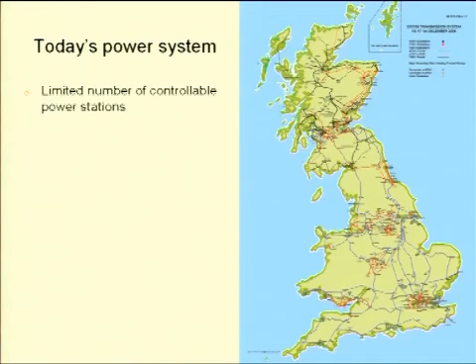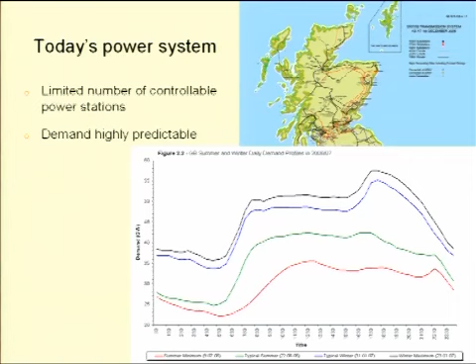So what do today's power systems look like? We have a limited number of large controllable power stations. Because they are thermal stations, we can control them. Demand is highly predictable. This is a typical daily demand curve, taken from National Grid's 7-year statement. Depending on the time of the day, of the year, we have a morning peak, then an evening peak, and the demand drops, which is highly predictable and repeatable. So basically, the whole system operation is demand driven. Whatever demand requires, it is delivered by generation.

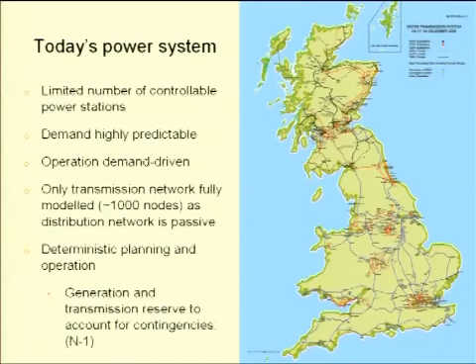For modeling how to run the system, we model only the transmission network, which means about these 1,000 nodes, because distribution networks are passive, and they've been over-designed in order to cope with any amount of load required from them. And the typical approach is deterministic planning and operation. All of that has served us well for at least 50, 70 years. Coping with contingency is due to the N-1 contingency criterion, which I was talking about yesterday when I was talking about the blackouts.

So what's the future power system? We've been talking about it for the last 2 days a lot. It will probably be characterized by a very high number of uncontrollable renewable plants, and what is important, connected at both transmission and distribution level. So one of the main differences is that transmission level and distribution level are not as clearly divided as they used to be. Distribution networks start to be also active.

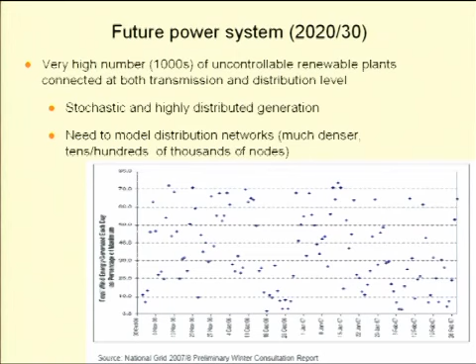So we will have stochastic and highly distributed generation, and what it means we know already. Mark O'Malley showed those kinds of slides today, I showed it yesterday. Generation can go all over the place. It is stochastic and highly distributed. And because that generation is connected at distribution level, for a lot of analysis we need to go into modeling of distribution networks. And this is not a simple task, because distribution networks are, I don't know, tens or hundreds of thousands of nodes for the whole UK, but basically it's an order or two orders of magnitude bigger task.

Now, the next thing is smart metering enabling demand response, which is the smart grids, the famous smart grids. People argue what smart grids are. Well, certainly one useful thing I can say about smart grids is they are very useful to put on any grant application. But what else are they? Well, this is the view from one of those European projects. Again, basically everything is nicely connected together, wind, solar panels, and controlled by some means

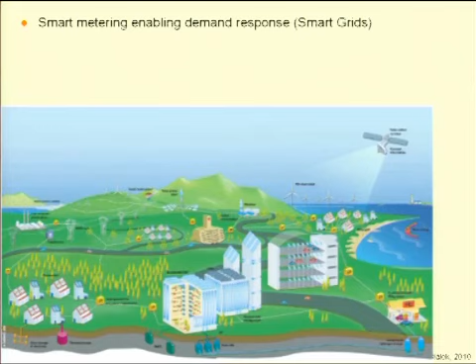The next thing is possible electric cars and storage. There's been a lot of discussion about it. From the mathematical point of view, one of the interesting things is that the storage and time shifting of demand creates stronger linkages between time periods in power system models. At the moment, power system models are run from one time instant to the next. When you have time shifting, there are basically linkages which need to be explored.

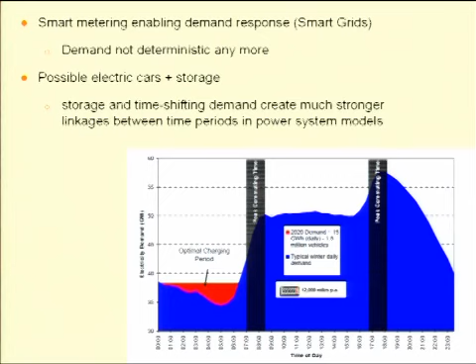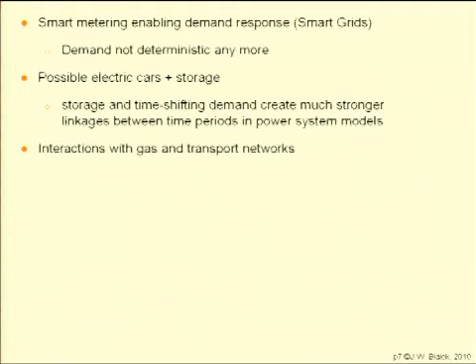Now, again, this is a slide nicked from one of the National Grid 2020 consultation documents. Basically, electric cars as such do not present a problem, providing you charge them at night, when there is enough spare capacity in the system. However, if you do them at peak demand periods, then you can create a lot of problems for the system. And the next challenge is interaction with gas and transport networks. Obviously, the generation is partly in gas, and cars mean transport networks. So all those things are quite closely connected together.

So in short, to summarize this quick review, the future power system, one can say for sure, will be more complex and more stochastic. So we need new modeling tools. So what's needed? Obviously, what we need is modeling of highly distributed and stochastic generation and demand. We did some work on generation. The question how to model demand is very much unresolved. There were probably hundreds of wind studies, what is the wind resource in this country and other countries. What I feel is missing is the stochastic characterization of resource and demand. What are the linkages between the two?

The next issue is, because of the distributed nature of the generation and demand, we cannot deal with models with hundreds of thousands of nodes and modeling of individual customers. We need tools for aggregation of distribution, generation, and demand, and modeling of interactions between them. So to summarize, what we're talking about is a huge complex system, and something which this morning Sean, no, sorry, not Sean, Mark was talking about: modeling of human behavior. If people don't charge those cars at night, for example, they can completely wreck the power system.

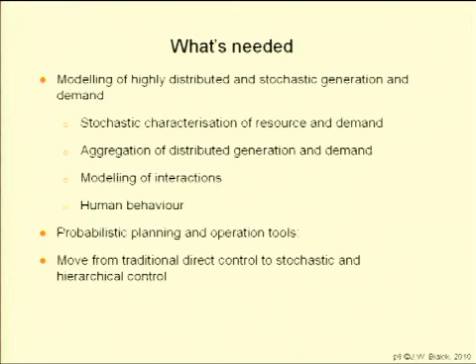And something I've been talking about yesterday is probabilistic planning and operation tools. At the moment, it's all deterministic. In the future, we might need probabilistic planning and operation tools, and it is not clear at all how they will work and whether they'll be accepted. And as far as control is concerned, at the moment the centralized power plants connected to the system are controlled, basically, because they're controllable. In the future, we might not be able to control them directly, so we might need to move from traditional direct control to stochastic and hierarchical control. And again, it's a big problem.

So these are quite general statements. So let me go into more detail and give you three examples of the work I've been involved with in Durham recently. The first is risk calculation and capacity credits, which is the work done by Chris Dent, who is currently on secondment with National Grid, and that links to some extent to the presentation just a few minutes ago by Steve Smith from Ofgem.

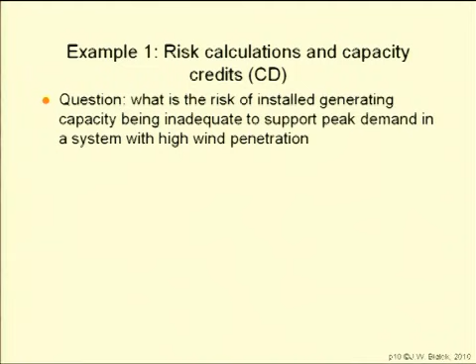So the question is, what is the risk of installed generating capacity being inadequate to support peak demand in a system with high wind penetration? Actually, the question is more general than that. It's not only peak demand as such, because peak demand may be 1 hour, but what is the possibility of the generation to support demand over the period of the peak demand, which can be the whole winter. So in other words, we can put this question: what is the capacity credit of wind generation?

And again, the slide was in the previous presentation. And the work Chris did was to evaluate the risk of a projected fleet of wind plus conventional generation, and calculate the capacity credit, which is basically what would be the traditional thermal capacity which would give the same amount of risk as in the all-conventional system.

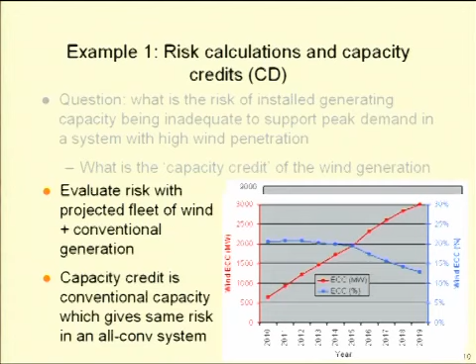Another way of looking at this is the effective capacity credit of wind. So this is over the years. As you can see, the value in megawatts increases over the years, while percentage-wise it drops. It doesn't drop as dramatically as Mark O'Malley was showing this morning in the slide. If you want to ask why that is, I'm happy to take it, or Chris will answer this question after my presentation.

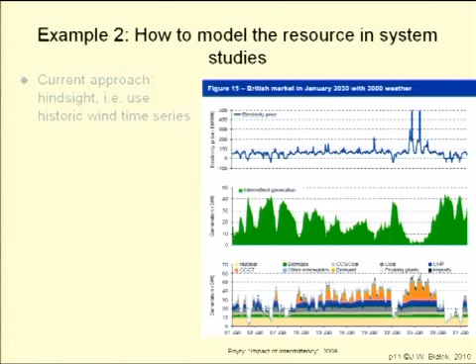The second example is how to model the resource in the system studies. The typical approach is to use hindsight. It means if you want to know what is in the future, basically we use wind data from the past. And there's a famous Pöyry intermittency study which was published last year, where they look at the British and Irish market in 2030, assuming that we have the wind of the year 2000, and they got different results. So there are some examples of the prices and generation.

Well, there is nothing wrong with that approach. It gives robust results because it uses actual wind generation for a particular year, but provides limited insight into what might happen in the future. So what we believe is needed is a stochastic spatial-temporal characterization of the resource, how the wind will vary, and demand.

Yes? Yeah, you seem to go into the modeling or predicting aspect, but things like should the wind generator be connected directly to a grid at all? Questions like this, will they be part of your talk? Maybe we'll talk about it at the end, because during the presentation maybe just clarification questions.

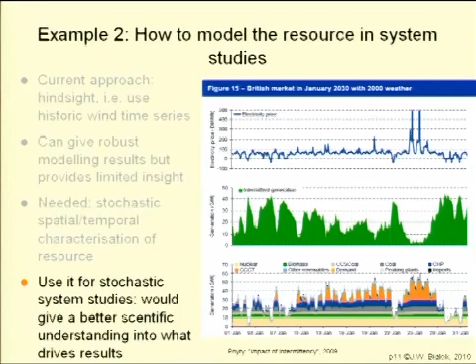So if we have that spatial and temporal characterization, we could use it for stochastic system studies, and that would give us better scientific insight into what drives the result the way it does, rather than just doing results for wind in a particular year.

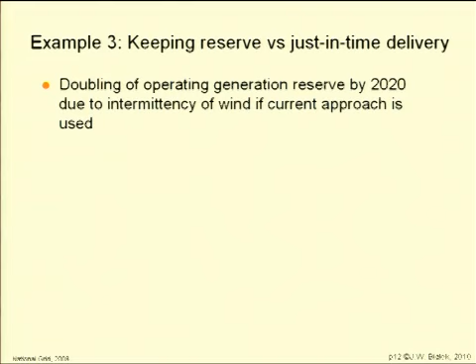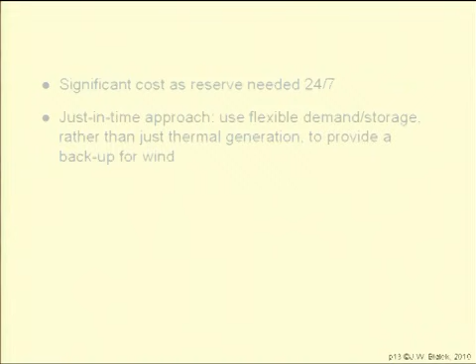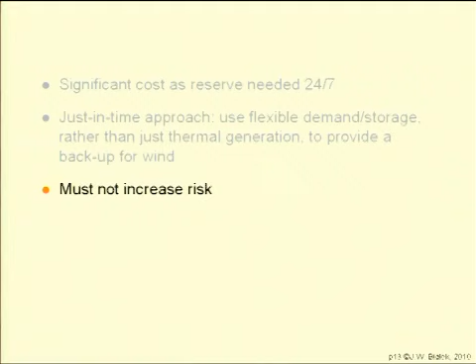So that is obviously quite expensive, because that reserve is needed 24/7. So a just-in-time approach would be to use flexible demand and storage rather than just thermal generation to provide a backup for wind. This is obviously easier said than done, and it must not increase the risk, and National Grid is by definition a rather conservative body, and quite rightly so, because at the end of the day we need to keep the lights on. So this is quite an interesting issue. It requires approaches from statistics, stochastic control, because we are talking about stochastic generation and stochastic demand, and operational research. So this is a very interesting research issue.

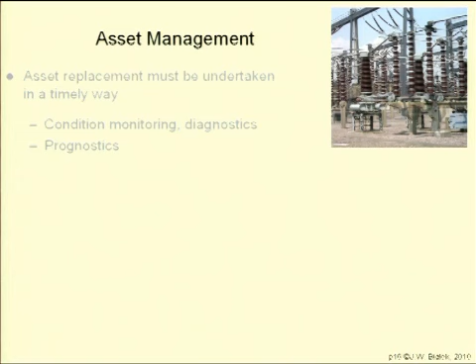I nicked that slide from Andy Thomas from Central Networks, by the way. So asset management is an important issue. The replacement must be undertaken in the appropriate way. So we're talking about issues, again, mathematical modeling, condition monitoring, diagnostics, prognostics. It means looking to the future rather than to the past. One problem is that often we have limited information about some of the assets because they are replaced before they fail, so we don't have any failure characteristics.

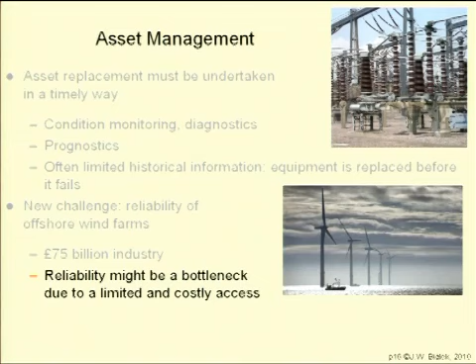And the new challenge which is coming is reliability of offshore wind farms. Because access to the wind farms is limited, and this is a big industry, a 75 billion industry, reliability may be a bottleneck due to limited and costly access. So involvement of statisticians and mathematicians is required, and we are doing some work on that using Bayesian statistics.

Funding opportunities for energy research. Well, actually, as a researcher in energy, I have to say that basically I don't remember we've ever had such a good time. There are plenty of opportunities. The Research Councils UK program is the largest, about 200 million pounds, which is more than all the other programs taken together. And fortunately, UK ERC are very much for interdisciplinary research. It means engineers working with economists, working with mathematicians, working with social scientists. So this is exactly what is required.

SuperGen is the flagship initiative, but it's soon to be folded down because it's coming to the end. And now briefly about two initiatives. One is Grand Challenges in Networks, which will look 20, 40 years ahead, probably announced in the summer. I've been to the workshop when we discussed the areas, and some of those areas which we've talked about probably will be included. Flexible grids, uncertainty and complexity, energy and power balancing. We don't know what the call will look like, but it's quite likely to include those subjects.

And the second call, which has been out for about a couple of weeks, is Mathematics Underpinning Digital Economy and Energy, deadline of the 1st July again. So this is basically for mathematicians, how to model economy and energy problems.

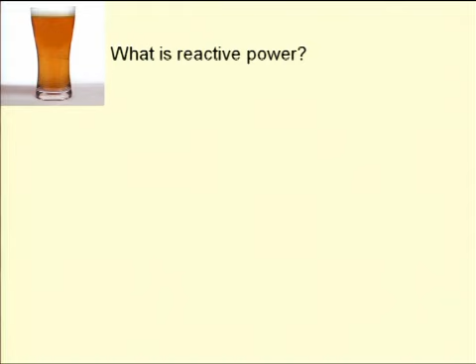And that's all you need to know about reactive power: it is oscillating energy between the source and the load. It's called reactive power or imaginary power because you cannot use it. Symbol is Q, real power is P. Well, this is one of the confusions with economists, because for economists Q is quantity, P is price, so sometimes we have those problems with nomenclature. So on average, obviously, the energy transfer is 0. It means you cannot use it for any useful purposes, but it is important to remember that reactive power, those oscillations of energy, are always there in the network.

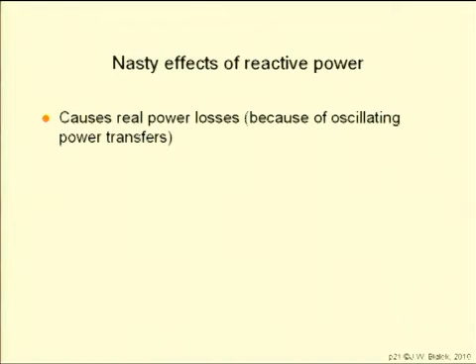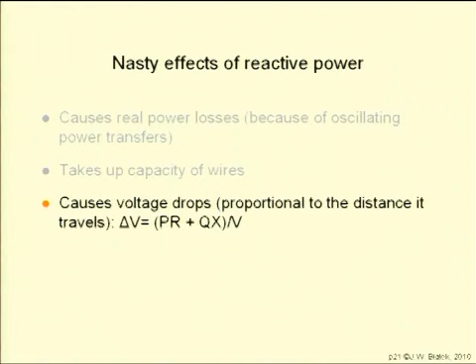And in the high voltage transmission network, X is much higher than R. That means that the voltage drops are much higher due to the reactive power, which means that you cannot transfer reactive power over long distances, because X becomes very high. It's basically a linear function of the length of the line. And you can compensate reactive power by capacitance. And that's why it is also sometimes called voltage support, because you have improved voltage characteristics.

So conclusions: grid integration, smart grids, and the need to rewire Britain create a huge pool for new research. Collaboration between power engineers and mathematicians, statisticians, and also social scientists is crucial. There are significant funding opportunities, and the most important conclusion is that reactive power is not small beer. Thank you very much.

Congratulations on fitting it in. So time for some questions for Janusz. So one, no, and then one here. Oh, we don't want one from Mark. No.

Go on. I disagree with you on the load. You said it's stochastic. Yeah, or it can become more stochastic. It is stochastic at the moment. If I designed a power system to supply my load, it would be incredibly difficult. The reason we can do it is because I'm part of a population of 4 million people. So it is already stochastic. So I don't agree with you. It won't become more stochastic. Well, that's aggregation effect. That basically is a large population, and you have accuracy of load prediction.